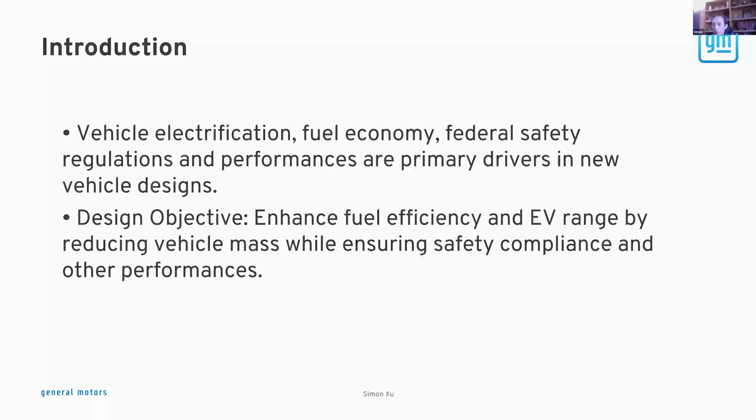So here I just focus on one problem, which is the fuel economy, efficiency, and EV range requires significant reduction in vehicle mass, but also while ensuring safety, compliance, and other performances. So this is a very interesting optimization problem that we tackled in the past with a manual process, and now we try to move into a more optimization-based process.

First, I want to introduce the idea of the magic of mass compounding. It's just an interesting idea, some of you may already know, which is when you reduce the mass in a vehicle, obviously it improves fuel economy, right? But also it lowers the loads on the powertrain.

Hypothetically, if you're reducing some mass on the vehicle subsystem, like the seats, frames, and structures, you actually reduce the mass of the total vehicle, which requires a lighter powertrain or smaller battery because you don't have as heavy a system to carry. Now if you have lighter battery and powertrain systems, the mass of those systems also significantly reduces, especially the battery, which is very, very heavy. As a result, you can continue reducing the mass and having improvement, and thus the compounding factors - I don't know if I make it clear.

Basically, reducing the mass of some component will result in lower mass in the battery or engine. The battery mass and engine will be actually lower, and as a result, more mass saving can be given, so you can have even lighter engines and lighter batteries. So there's a compounding effect. And also the reverse is true, because a lot of times people don't realize inside the company that we're adding mass just for some convenience in engineering, which actually causes a cascading effect of mass increase in many other systems.

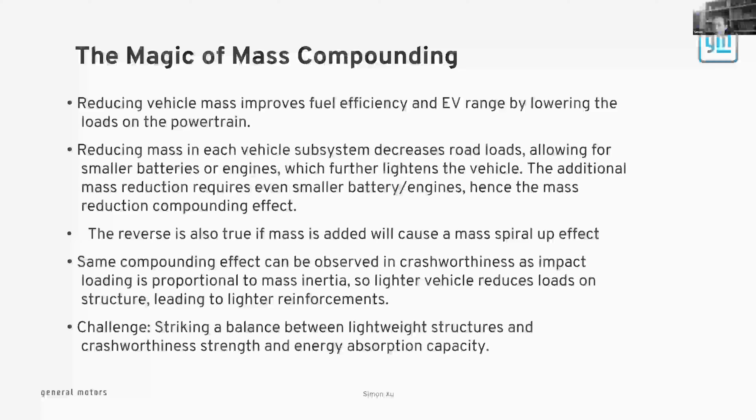It's a very complicated problem to tackle because you have to satisfy all these other requirements when you reduce mass. The role of design optimization is that we can use optimization to enable rapid assessment of different ideas, leading to total optimization for the goal. Typically the objective is to minimize mass because this is common, but there are a lot of performances, or constraints, in the optimization that need to be satisfied.

For example, in safety you have frontal impact, side impact, rear, offset, rear roof crush, all kinds of scenarios. Each one has its own test cases, many different requirements you have to meet. The two main requirements in safety are strength, which means the safety cage of the vehicle has to be stiff enough so it doesn't collapse, and that's the strength part.

The other part is energy absorption, where you want the vehicle to absorb enough energy so the deceleration or harshness of the impact to the occupant is minimized. Imagine you have to design a vehicle like a spring that absorbs energy, but a spring is not stiff. So right away you have two competing factors in vehicle design, and that's the interesting part of optimization - you need to balance all these factors that sometimes conflict with each other.

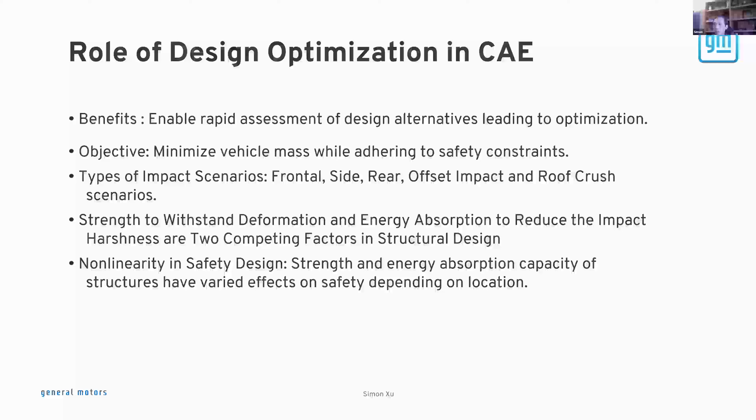Also, there's high nonlinearity in safety design because strength and energy absorption affect many different components and different parts. It's a very complicated problem because buckling and path dependencies also exist. These are the general ideas I'll go through quickly. Reducing mass, the simplest way is reducing materials, like the thickness of materials, but if you do that, you reduce the strength, so you have to balance the two.

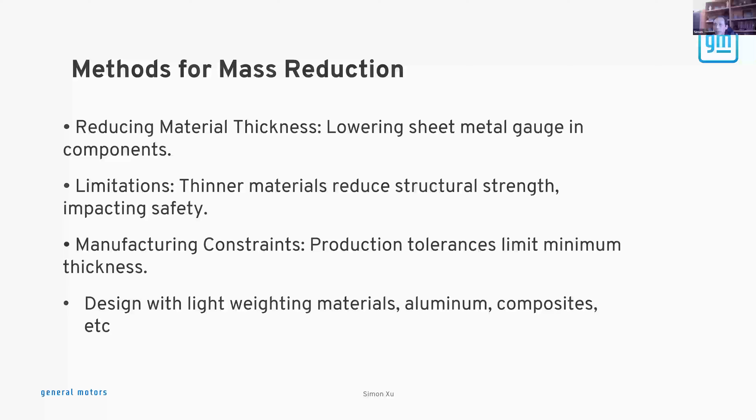Let me go through quickly. The challenge is how do we navigate these highly nonlinear systems, and also multiple systems we have to navigate with different simulations, all physics-based. Also in manufacturing, we have tolerances, so nothing is built exactly as you want it, so you have to carry some uncertainties in performance.

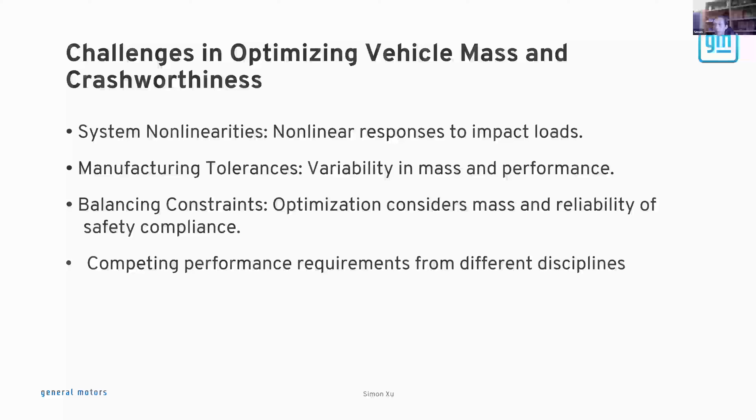Let me just keep moving. Here's a picture of what we call MDO - multidisciplinary optimization. I think some of you have been working on this for years, I've heard about it. It's not a new concept, it's been around for a long time, but the issue is how to resolve it because of the complexity of the issue.

You can see in the picture, maybe it's easy to follow. You have different load cases, or disciplines. Crash is one thing I already mentioned - you have front, side, rear, and also other requirements such as protecting pedestrians, we call it pedpro. Bender is really the bumper requirement, and so on and so forth. There's a lot of these.

On the other hand, the vehicle has to withstand noise and vibration - NVH stands for noise, vibration, and harshness. So you have modal frequencies, acoustics, low frequency, mid frequency, high frequency, different physics. Then you have dynamics, in that the structure has to be stiff enough to set up the suspension system, which absorbs energies. You need enough stiffness so energy absorption can be made, and also precision of driving for steering has to be stiff enough so you can drive the vehicle without actual delay.

Then on the other hand, you have fatigue life, durability stresses. All these interesting things are related to finite element models, basically dynamics models. And then you also have aerodynamics, some of which has to do with exterior styling, the architecture, and also internal aerodynamics in terms of HVAC systems. All these things have to be considered in the total system in order to optimize.

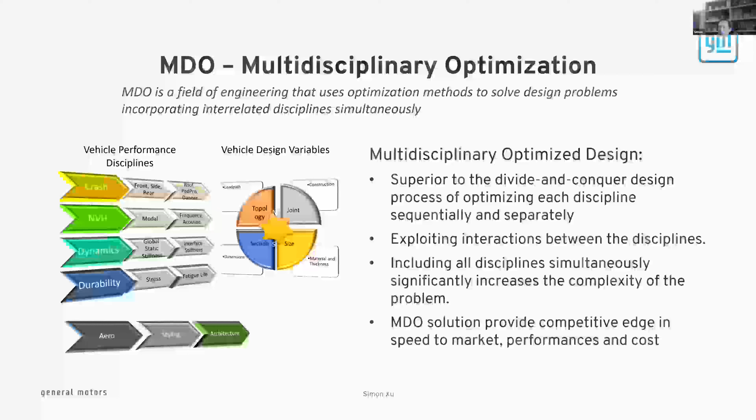The reason is that you can optimize one system for some purposes, but the systems are shared among many different disciplines, so you cannot just change it without affecting everybody else. That becomes a complicated problem, and this is where we actually focus in MDO to solve.

So here's basically, you guys can see, right? We developed a system called ASPEN, Adaptive Search and Progress Exploration, as a title. This is the gist of the algorithm. We couldn't share too much detail because we view this as a competitive edge. It is an industry-leading algorithm capable of handling hundreds of variables and hundreds of constraints, so you can solve really large problems in vast large spaces.

And we have many different commercial software and academic codes that we introduced, and Aspen is trying to get to the best of all the possibilities. So we have a system now set up to do this. On the right, this is the gist of what we do.

First, you have an initial DOE, which is the blue dots, that occupy the whole space. This is shown in 2 dimensions, but actually you have 100 dimensions, so you can imagine that you don't have many points in each dimension in terms of populating the grid.

And then you go through different simulations: safety crash, modal analysis, NVH. Then internally, we fit a quick response surface for each of the performances. Let's say if you have 200 performances, then you will fit 200 quick response surfaces. Once you fit that, then you can do optimizations.

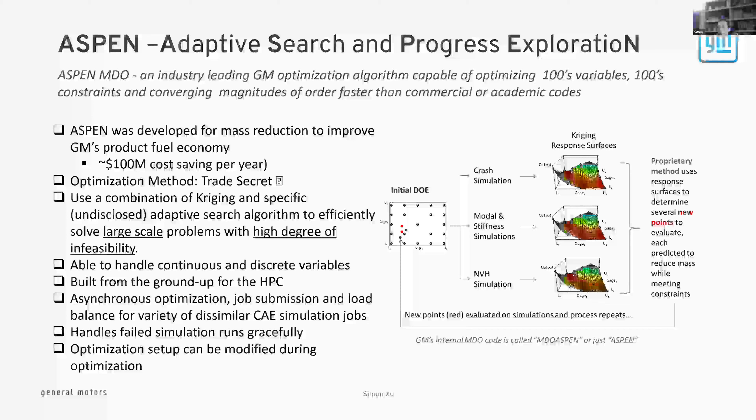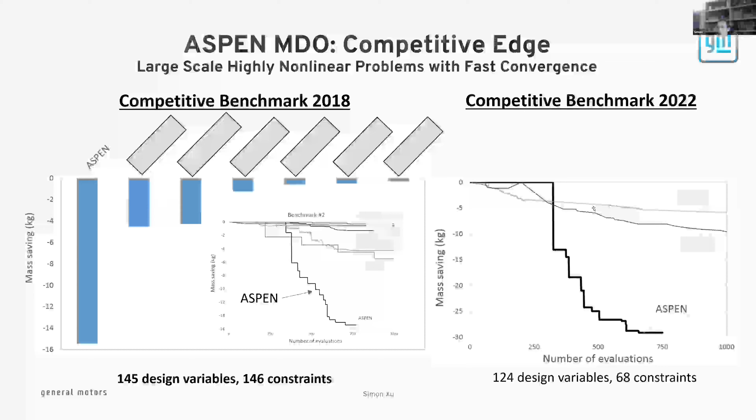Here's another example that we did recently, and a similar result. So I can explain in the next slide why you have such differences, even though they are all optimization. Somehow the computer doesn't like this slide, I think that one slide has animations.

So here's something interesting that might spark additional research ideas. A typical variable range, let's say 100 variables, if you have 30 levels, meaning a thickness of 1 millimeter, 1.1, 1.2, 1.3, usually going by 1.05, so you have about 30 levels on a typical problem. That's 30 to the power 100 factorial design possibility. It's a really, really big space to explore with, let's say, a couple hundred evaluations.

So as a result, you need to do adaptive search to get there. It's like zooming in 100 times, then you can get to the answer. That's the only way to do that. So I'll show you the example here.

At the bottom you can see a distribution of blue dots, this is the DOE that we do. It's all Latin hypercube, like a Latin hypercube kind of DOE, but we actually have a slightly more optimized version of that. The original starting point is orange, and lower left is more optimal because mass lower is better, displacement lower is better.

You can see, even though we are starting with a design here which is kind of optimal already by manual standard, when you do a DOE, none of these points are better. You would think the point would be somewhere in the middle so you could pick the best from the DOE and go from there, that's the kind of concept people have before they actually know the problem. But the problem is highly nonlinear, you don't get this, because the optimality is in such a small region. If you get out of it with a DOE, you don't get to that.

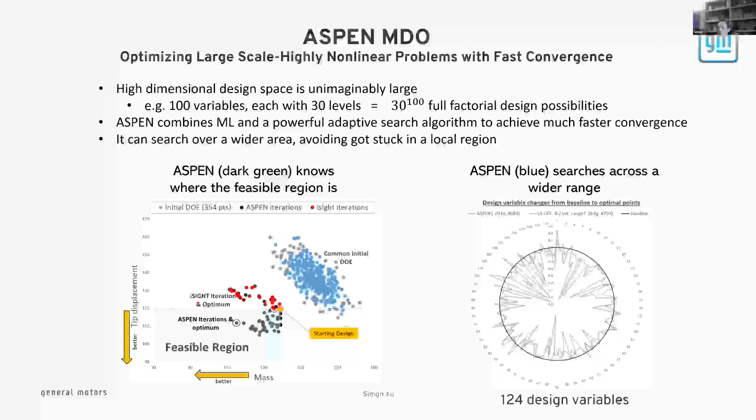So now that we've solved this problem, we're applying this to any problem that we can see. For example, there's some examples here just for fun. You can see these NVH, vibrations, stiffnesses, and dynamics in the middle, that's supposed to be moving, and I think it can move.

This basically shows the vehicle going through bumps and so forth. And if you turn attention to the right, it's a different crashworthiness scenario. I just edited the video so that you have the side impact and the rear impact, these are simulating cars hitting from different angles.

And you have the car hitting the wall, hitting a pole, and offset means hitting another vehicle at offset locations. And I think dynamic doesn't work, that's fine.

In terms of design variables, you can change the gauge, which is thicknesses. You have material grades - different grades of steels, aluminums, or even magnesiums, or composite. Also you have shape changes, or section changes, and spot welding, because the car is welded by these spot welds with pieces, like basically Lego pieces put together. So you zip them in the assembly plant.

There's a requirement to make sure the spot weld is minimal mass, so we don't put too many spot welds where we don't need that, but we need those for actual crash performance to make sure that it's tight. So there's also an optimization problem you can solve with these kinds of things. We have been pretty successful in applying these almost everywhere that we could use.

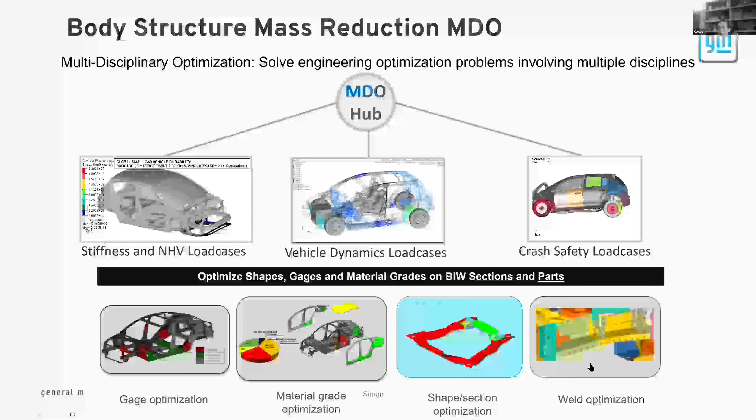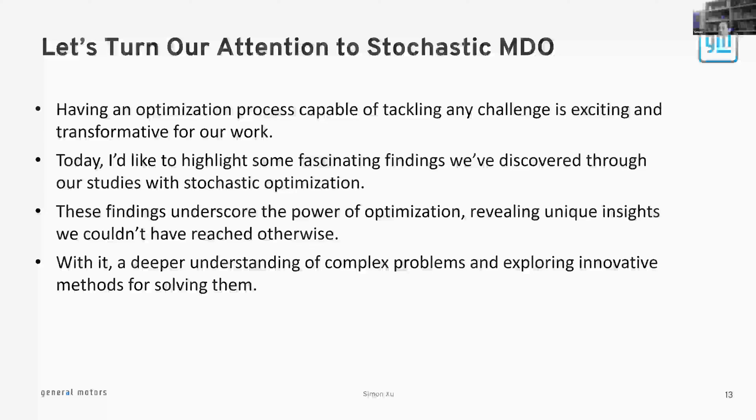So the next frontier I want to talk about is stochastic MDO. Now we have a capable process. I'd like to highlight additional recent fascinating findings we have through our studies on stochastic optimization. These findings underscore the power of optimization, which can reveal unique insights we couldn't have reached otherwise. With it, a deeper understanding of complex problems and exploring innovative methods for solving them will be something. That's why I want to bring this example here for people to kick around and maybe ask some questions.

So first of all, we want to develop this on top of the MDO, a stochastic-based optimization methodology, to optimize the robustness of crashworthiness. Because in reality, if a car is designed as a 5-star, we think, sometimes the government will randomly take a car from the lot and test it. We may even get 3 stars from that because of variations in a multitude of things that could happen and make it deviate. So we want to minimize the chance of this happening.

And so we need to have an approach. But typically engineers have an approach they call safety factors - basically they over-design it. GM always, if you look inside, we actually design products with much higher standards than the typical published standard. But on the other hand, if you do that, you are suboptimal because your mass will be high, and your cost will be high.

So this is kind of emblematic of a GM vehicle. If somebody ever drives the vehicle, it feels heavy, steady, more materials. That's because we have a lot of safety factor built in. But I think this is more like an old-fashioned way to do engineering, right? In aerospace, we know that in school.

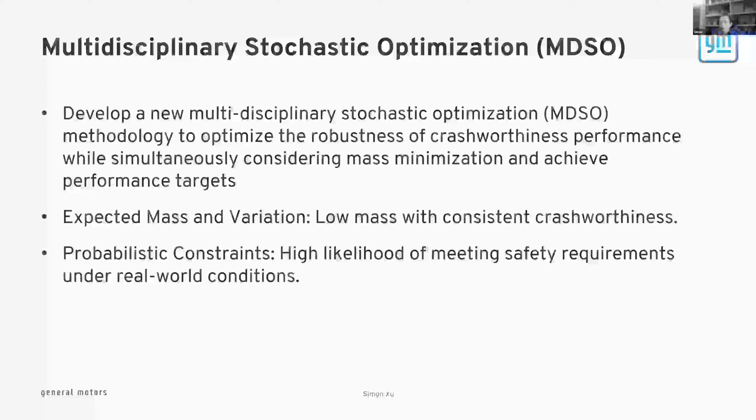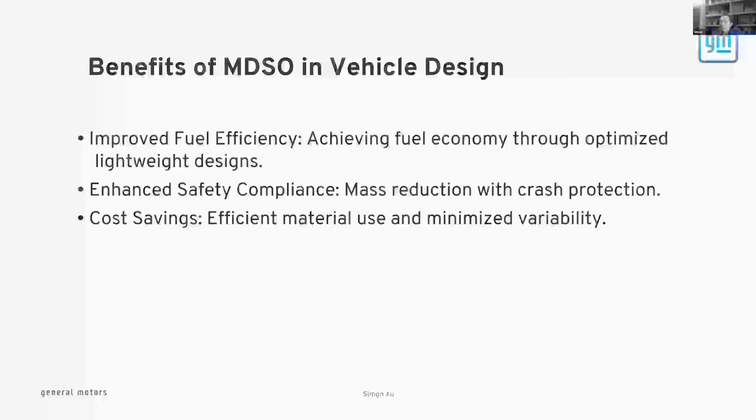So we want to introduce the process of using stochastic methods and variation uncertainty quantification to be able to narrow down, and maybe design even better, which I'll show as an example, which we can accomplish if we have the right tool. So the benefit of MDO stochastic is obviously you can achieve fuel economy and also get better reliability on your vehicle when you actually have the performance.

So these are the typical uncertainties - I didn't list all of them. Material property variations, sheet metal thickness variations, sometimes both, because when you stamp the vehicle parts, due to the curvatures and the pressure you're pressed on the die, the metal thickness is not even everywhere. Some places are thicker, sometimes thinner. If you're kneading dough, you know what we're talking about, right?

But also because of the pressure and residual stresses, each part actually has a pre-stress or pre-tension that changes material properties. So that all rolls into even one part. Imagine you have so many parts together, that's even more complicated. Of course, the operating environment - temperatures, humidity, acceleration off by 0.1 G can make a big difference, speed. And also we have assembly variations. When you assemble so many parts, each part may slightly deviate and you end up with big variations.

And the last thing I want to mention is there's uncertainties in our simulations because we use highly nonlinear simulation like LS Dyna, for example. What we found out is this kind of explicit solver can exhibit convergence issues. In the old days, depending on the computer platform you're running, you may get different results. When I first joined the company, that was kind of an interesting and frustrating fact. So people want to only run on particular CPUs, particular types of machines, so that they can have a consistent result, even though it's inconsistent between the machines.

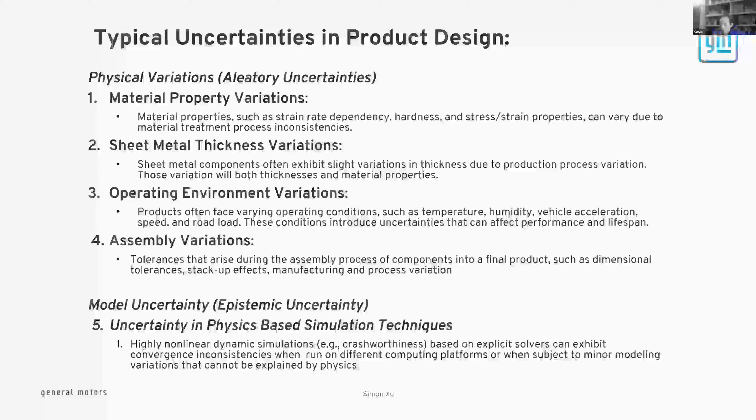So reliability-based optimization, reliability-based design optimization, as I already mentioned, is that we want to ensure the probability of failure or violation remains low. Like if you randomly test the vehicle, it has to pass with a good 5-star rating. We don't want to go to 3-star. Of course, this is subject to all the uncertainties in the design variables, especially in the material property, because we know the steel stock actually has a tolerance they give us. They don't guarantee from the steel company that 1 millimeter will always be 1 millimeter.

There's a plus minus range and distribution. So if we know that information, we can actually account for it. That's the idea.

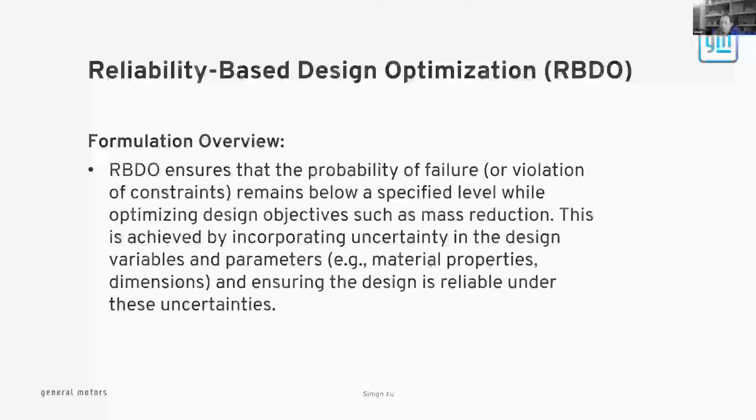So this is a simple mathematical formulation. Quickly, you can read that. Basically X is the design variable. G is the performance function, driven by the variable, could be crash performances. And D is your random variables.

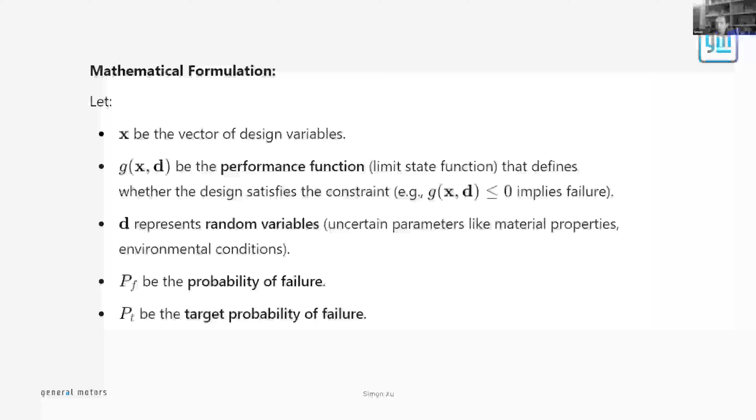But in the problem that I'm going to show, D is part of X. Basically, it's X, but it has variations - when X is equal to 1 millimeter, D could be plus minus some small percentage from that. And the PF is the probability of failure, T is the target, because we want the probability to be 100%, but it's not possible, maybe 95% target non-failure, 5% probability of failure, or could be 1%. It depends on the situation.

So the optimization, the goal is really to minimize the function. In this case, the function could be mass or cost - that's also important. And subject to the probability of failure being less than some target value. And X has a bracket, lower bound and upper bound, because that's how you do the optimization.

So some techniques have been studied, first order reliability method, second order, but I do not quite like these methods, or they don't quite apply here because of high nonlinearity - I'll get into a little more detail - we cannot assume the output has a nice distribution, like a normal distribution, and it's far from it.

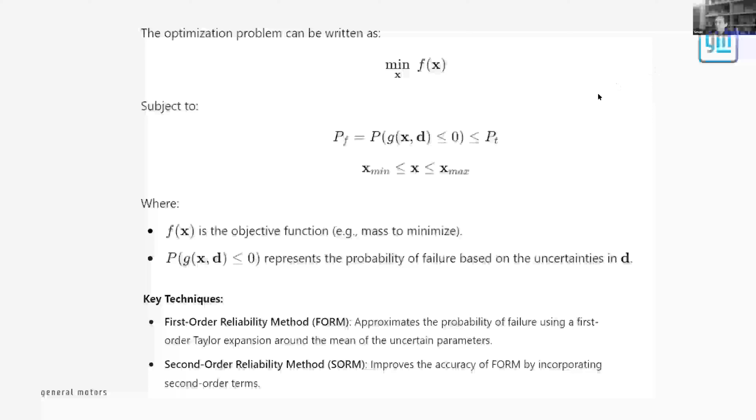So that's why we have to find some alternative ways to handle the reliability and to see if I can move. Just be patient, I press the button, you know, move. Oh okay, moving.

So the basic visual image typically people have in the literature or in their mind is that you have these constraints, multiple requirements, and there is an objective function going one way, like minimize mass.

Of course, as you minimize mass, you're violating the constraints. So the optimal solution, the yellow-orange dot, is at the boundary when you actually have the optimal. Sometimes it's not at the boundary because one constraint is active, the other one may not be active. But assuming that's right at the intersection.

So imagine if you do a small basic perturbation of the variables at the optimal values, you will see a cloud around this point. So in order to make it robust, you need to move the cloud away from the boundary, which is a kind of mean shift optimization to get away from it, similar to a safety factor we always use in engineering, right?

So we know that our target is to be 1, but if we do 1.1, higher is better. And even though there are some variations, I should be able to manage it, sometimes even 2x safety. So it's the same kind of concept without knowing the complexity of the problem. It usually could work if you have a large enough safety factor.

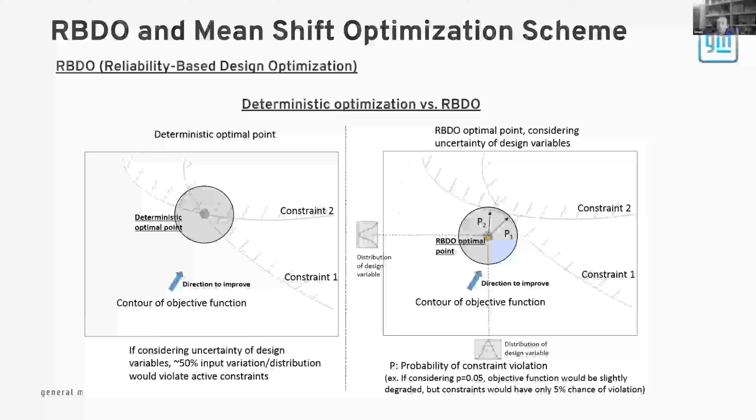But in reality, how things look, that's another question. That's why I want to show you this example next. So like I said, the limitation is the assumption of normal distribution may not be true, and real world systems exhibit nonlinear behavior that do not conform to it.

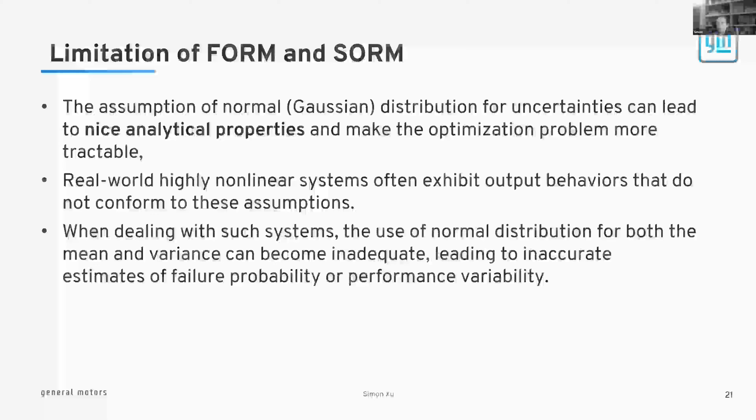And when dealing with these systems, we may have difficulties to accurately describe the probability of failure. But like I said, it could be practical that you keep moving from the boundary. Eventually, you can deal with it because we have to deal with it if we don't have any tools to deal with it.

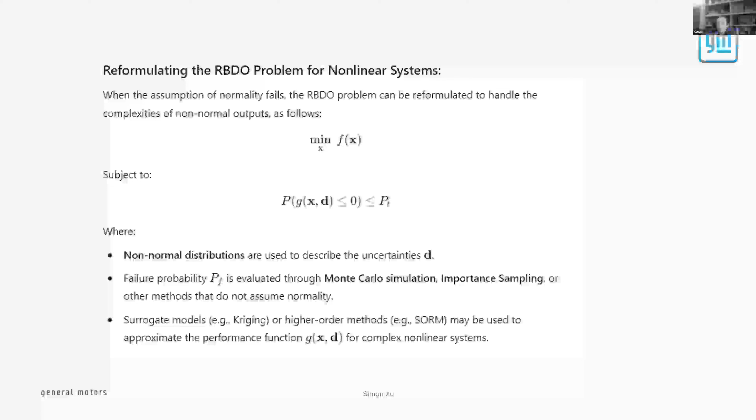So the way to reformulate the RBDO problem, this is not new either, is that you do the same thing: minimize the functions subject to the probability of failure being constrained. But on this side, the P is evaluated through a Monte Carlo simulation, which is basically changing the variable around each value based on the tolerances through a distribution and passing the variations through the function to the other end. So whatever comes out for that particular constraint is the distribution you're going to get. And if you have multiple functions, multiple outputs, then the joint probability is what we're interested in.

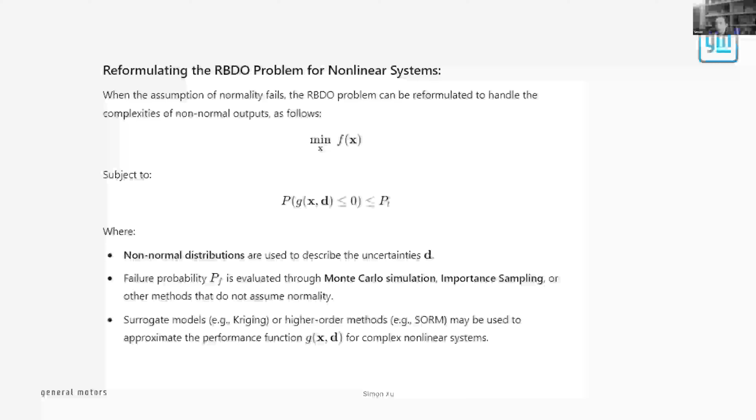Because if you have 2 crash load cases, you want both of them to be highly confident. Maybe one has a different value than the other. It doesn't really matter — it's really the joint probability of meeting both that we care most about. So that would be the correct way to solve it, but it's more complicated because now you have to do Monte Carlo simulation for each evaluation, which itself, like I said, each performance assessment takes 10, 15 hours with 400 CPUs. So how many Monte Carlo simulations can you actually do?

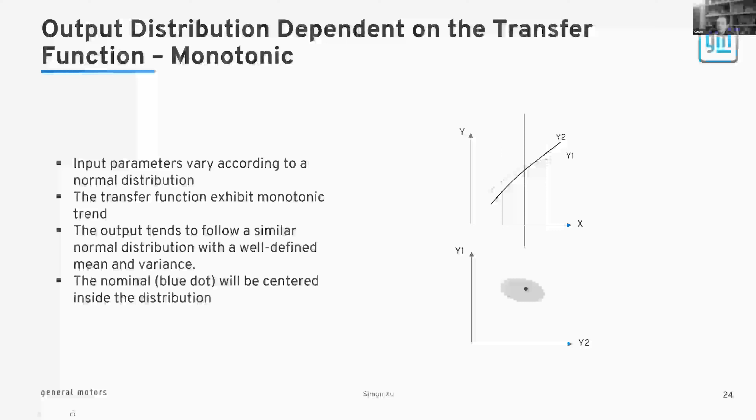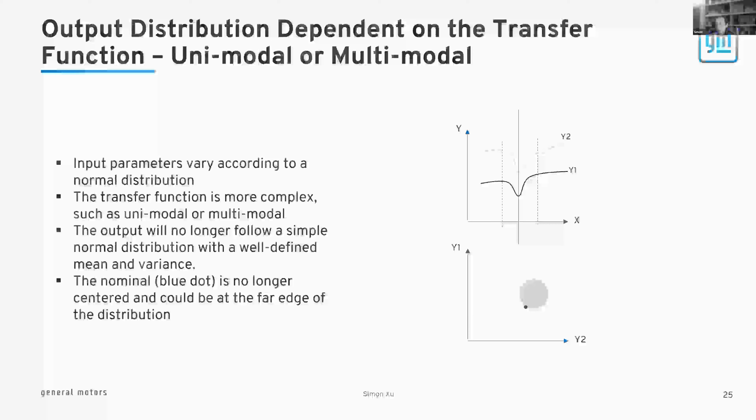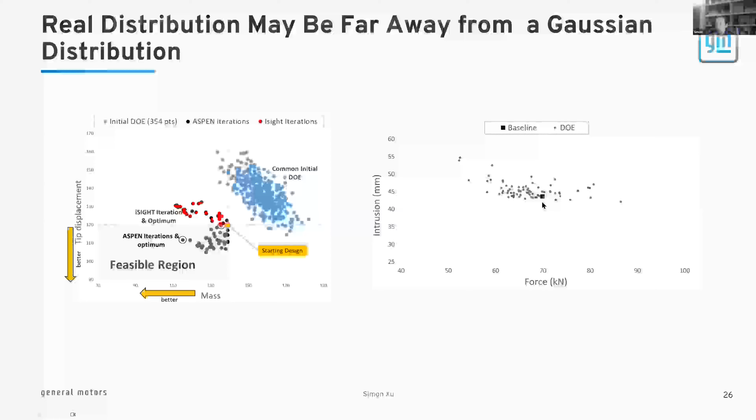Of course, this one has some lower values, but the force is too high, so it's not necessarily better than the black dot. That's why it makes it harder, or more interesting, to solve with optimization.

So Monte Carlo simulations — that's simple. Basically, you just do a Monte Carlo simulation with random sampling, then use response surfaces, since that's something we already built, and use this as a surrogate model. Even though the response surface may not be that accurate, at least around the point it's very close to it — the accuracy is good enough for assessment.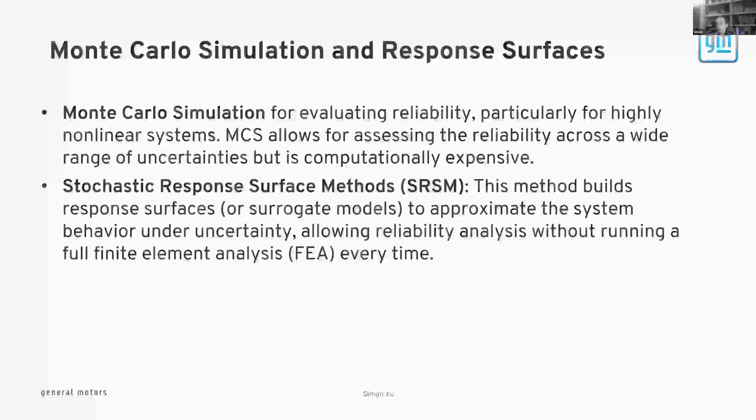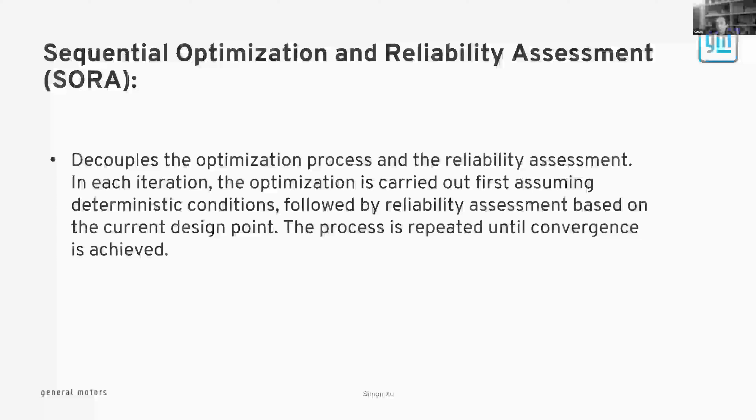But then we can update the surfaces locally once we get closer to the optimal. There are two different ways. One is sequential optimization, where some people do a deterministic optimization first, followed by reliability assessment, adjusting around that. This can work, but it will make your design very close to the design you already have.

The ideal way is concurrent optimization instead of sequential. There's a lot of work here. Basically, you want to do the optimization and assess the reliability at the same time for each of the points you're getting, then fit response surfaces, and use Monte Carlo simulations on each point to get the distributions of the variability.

Then I fit another response surface for the entire domain, so now I not only know the performance of whichever functional value at which point, but also the variability of that particular input. So if I have an input at a certain optimal value, I'll know whether its performance is good and whether its reliability is good. If I have another alternative point, I'll know this too. Now I have two response surfaces for the entire field for each performance, giving both pieces of information.

If I can define a problem like this, I can solve it, because now I just have two different requirements for each original requirement, doubling the constraints. Since our algorithm doesn't really have a problem with a lot of constraints, doubling the constraints just means adding more response surfaces. We can fit these response surfaces in parallel using HPC, high performance computing, and off we go. So this is how I construct this problem to be solved.

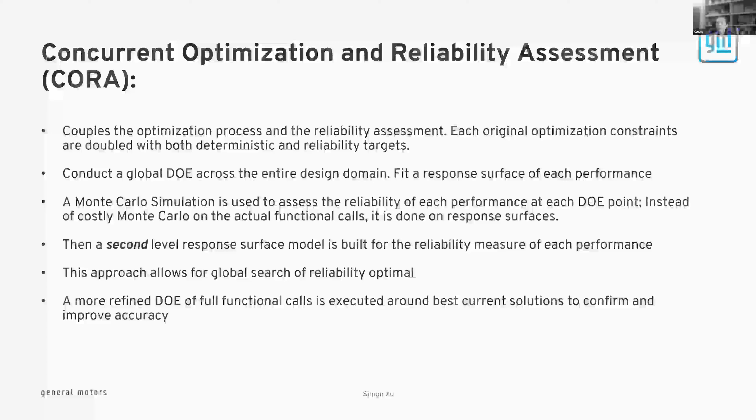So let's find out how we do. Here we have a safety problem, crashworthiness. I have two load cases, each with multiple outputs, US NCAP and Euro NCAP. One is the car hitting a rigid wall, the other is the car hitting another car, which is deformable but offset.

These are two competing requirements: if you hit a rigid wall, you want the car to be compliant, because the harder it is, the more it hurts you. If it's a deformable barrier, you want the car to be stiff, so you overcome the other car and sustain less damage. But they want you to meet both, so you balance out damage to yourself and to other vehicles.

So these are two competing requirements, with different targets. In this case it's a reduced problem so we can study more detail: 28 variables, each with an upper and lower bound defined based on manufacturing limitations. Plus we have thickness variation distributions based on plant-given variations typical from manufacturing, so we also define the band around those materials.

The total mass of all parts is to be minimized, because mass equals cost and mass equals total vehicle performance efficiency. The initial performance is close to requirement but not quite, because that's the best they can do at the time. For that particular load case they keep improving it until they can no longer improve it, then they give it to us to optimize. So it's not quite meeting performance, but it's not too far away.

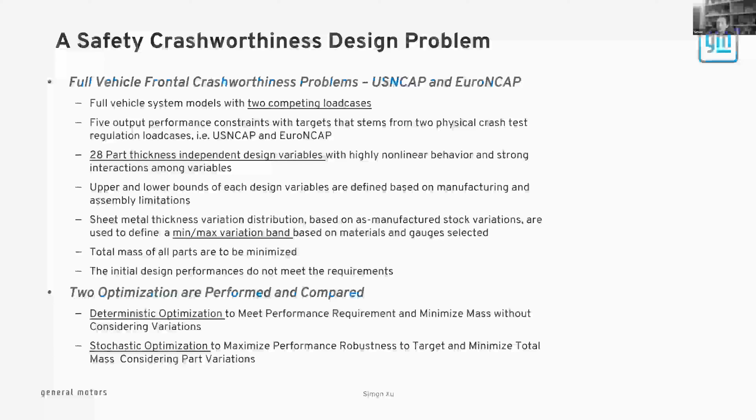Second, we did the stochastic optimization, which, like I mentioned, uses the formulation where I want to increase the probability of both performances meeting at the intersection, a joint probability, to be as high as possible without sacrificing mass. So that's the problem description.

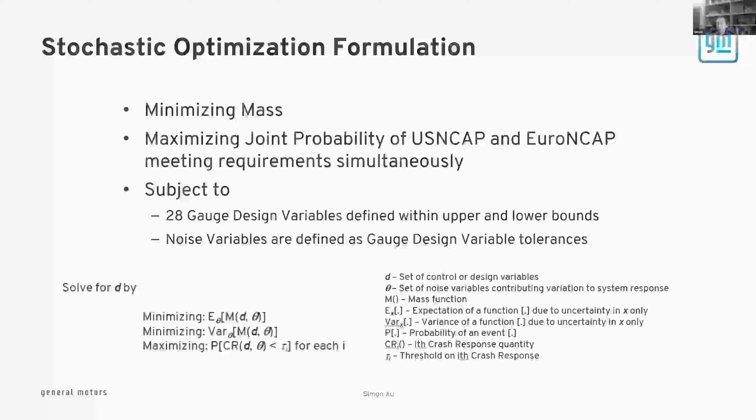I'll skip that — same thing, there's a formulation there, basically minimize the expected value of mass and variation of mass, which we don't need to worry about, and the joint probability of all the crash performances, 1 through I. In this case I have 4 or 5 different performances. So I want to solve this problem with the system we have in place. For the deterministic problem, I'll go through this quickly.

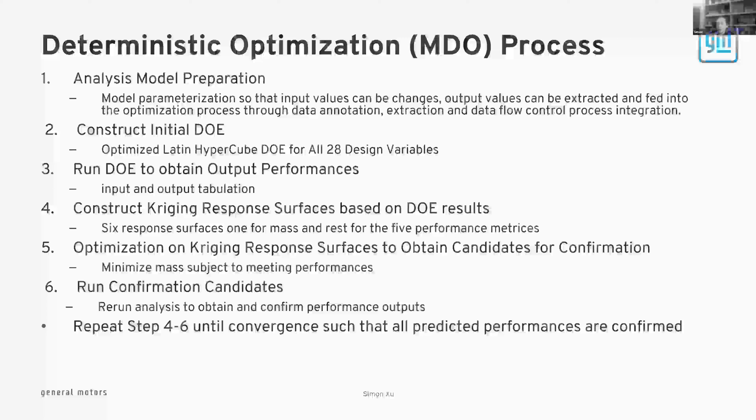We do the model preparation, parameterize everything, extract the data, and construct the DOE, run DOE, and then using Kriging response surfaces and optimize on the surface, but we don't trust the result. So we actually select different candidates to go back and iterate and repeat. Like I said, it could repeat 100 times or even more through the HPC. Basically, we don't need to worry about it, it just does it by itself.

The stochastic process, the blue ones, is basically adding additional things like Monte Carlo simulation on the response surfaces every time I have a DOE point. So let's say I have a DOE starting with 100 points distributed throughout. Then I fit the response surface. Now I have a surrogate model. I right away can do Monte Carlo simulation for each of these 100 points around it using the distribution. And now I will know the variability of each of these points, and then I can fit a second response surface to approximate the second order effect, which is what the variability of each performance is at each point, and fit it throughout, so I have a continuous surface that's differentiable.

So as a result, I have 2 different performances. One is the actual performance, the other is the variation of that performance that I can use as a constraint to optimize. So that's the gist of it. I will go into the detail that I already talked about.

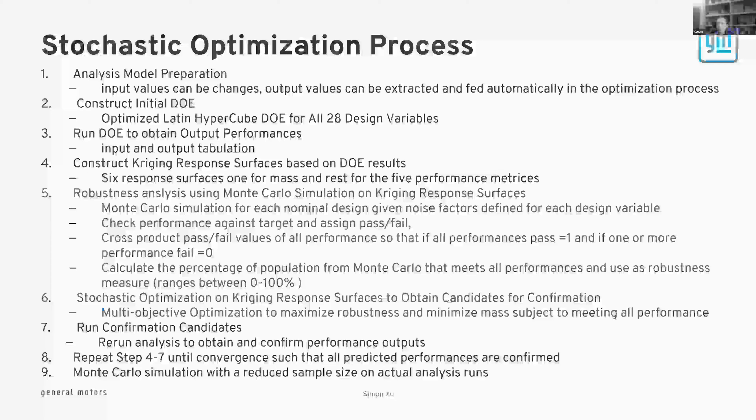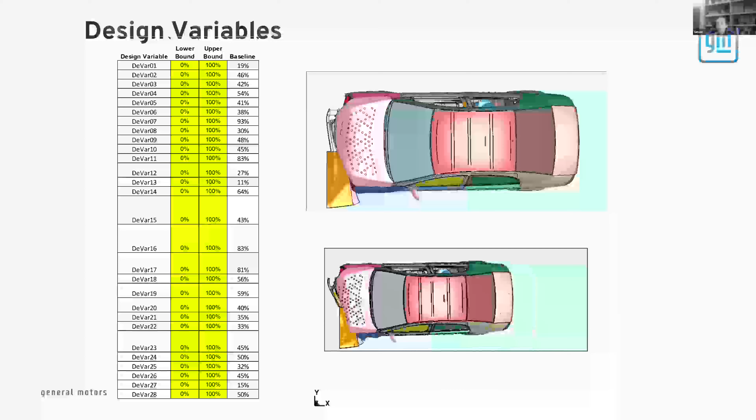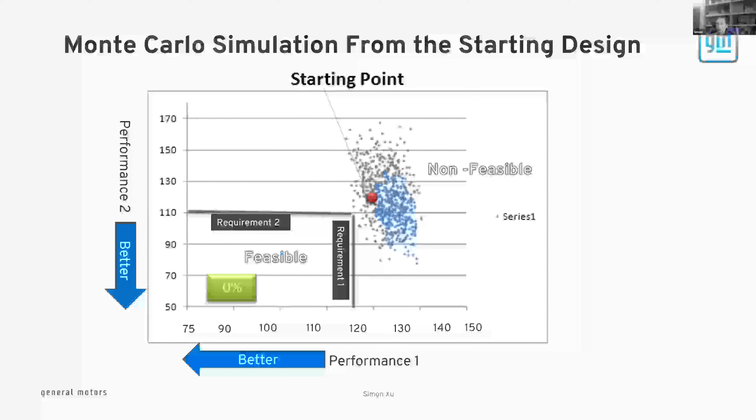And the reason is - I won't get into too much detail - is that we actually have a requirement that's higher than the normal requirement. So if you hit that requirement, there's a good chance that you're already kind of over-designed for robustness, and this is what we see.

Because every time you optimize something, you make things worse, since I'm on the knife edge, on the cliff. And I don't want to fall off the cliff by optimizing me to the end. So this is emblematic of what they have in mind, that you make it optimal, but not necessarily more robust. They can't articulate that fact, but this is what they're afraid of.

But basically our answer is that if you want something fixed, just tell us. We can put a constraint on it. In this case, we didn't have any constraint on the robustness because of complexity or something. But if we put it in, we may have a different picture. So I want to show you the next result.

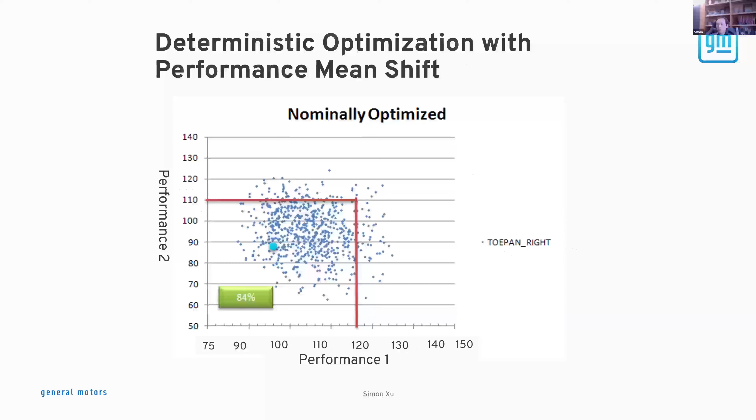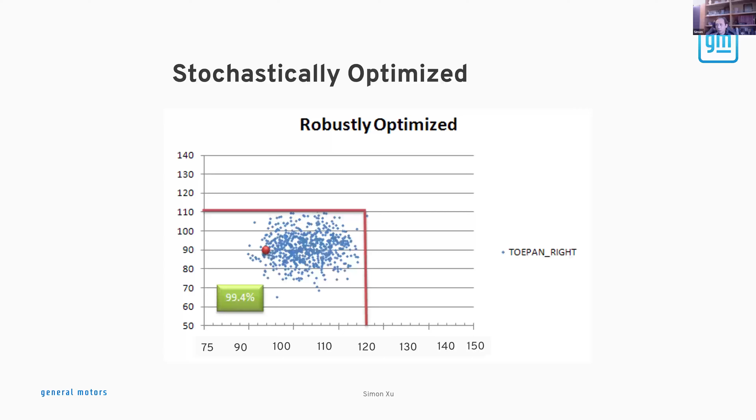So this is actually the optimization we did after we introduced the robustness variations into it. And you can see it's a lot tighter, and it's almost 100%, 99.4. So we're pretty happy with this result. You can see the dot actually also kind of shifted a little bit, but it's very close to the deterministic optimization. So we actually achieved what we think we want to do, because of the computer power and also the formulation.

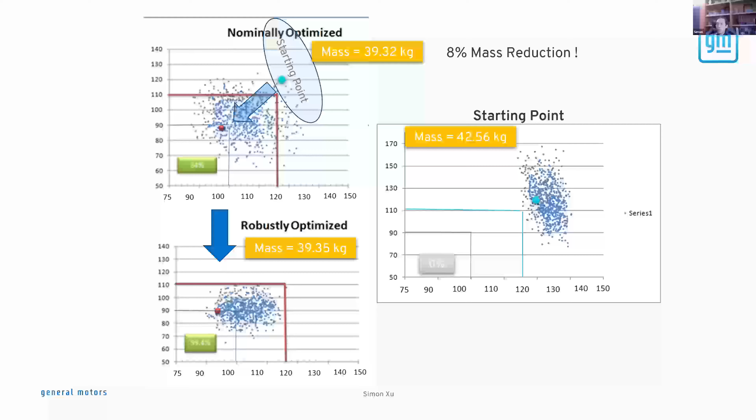So to me, these are probably not exactly the same solutions, but that means this kind of multi-dimensional space is very complicated. There exist multiple solutions in there. So if you ask a new requirement, it may navigate to a completely different solution if one exists. In this case, it has a different solution, which has the same mass, but different behaviors. You can see the red dot is close, but not really the same in terms of performance.

So the other thing people ask me is, hey, with the solution you have, they found they can't find the rules very easily as to why this thing is better. That's because the problem is so complicated. There may be multiple solutions and multiple ways to interpret the same thing. You're getting answers that meet the performance for the problem you defined, but there might exist alternatives beyond the one you already have.

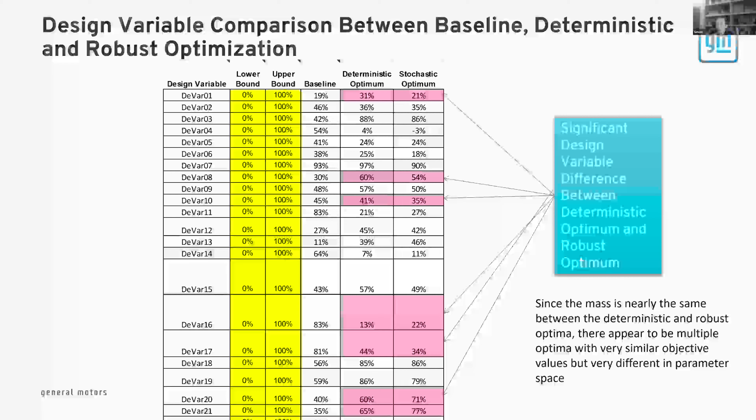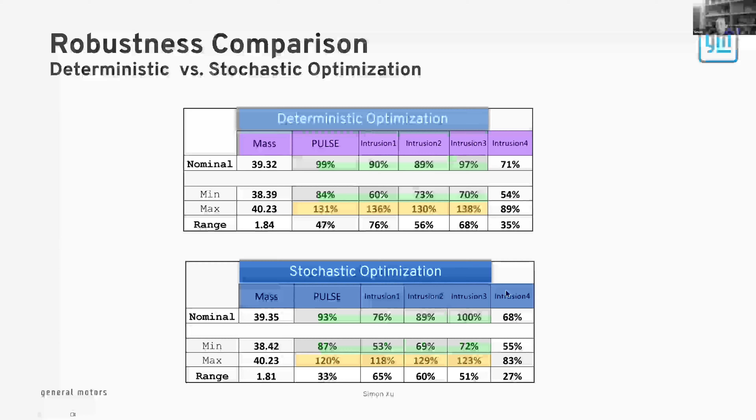This is one thing I want to spend a minute on, to understand better: in the high dimensional space, it's very hard to visualize because it's more than 3 dimensions, very hard to draw. In this case, I have 30 dimensions. So what I did is draw a straight line between the deterministic solution and the optimized solution. Let's say the deterministic solution is at 1, 1, 1, and the optimized solution is a different number, three sets of numbers. So I just draw a line going through the hyperspace from one to the other, and then ask it to print out, since we have response surfaces, what will the performances be going through this line? Is it getting better or worse, and what's in between?

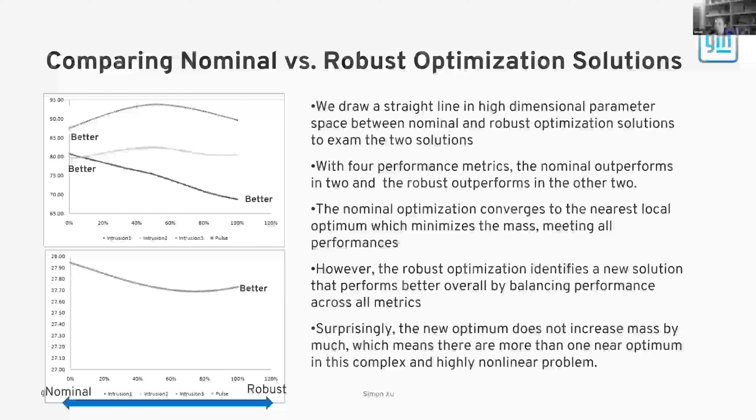This is an interesting point I want to raise, food for thought in terms of optimization. With this, we have a much better understanding and a tool we can use to solve a lot of similar problems. So, kind of a recap: we now have a tool, and we're able to successfully solve the problem.

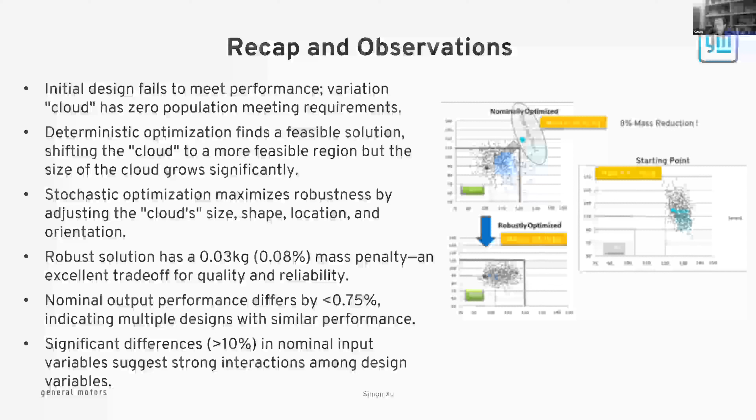But the solution makes sense in the end once we see it. That's usually what we find—once you solve the problem, it starts to make sense. If it doesn't make sense, you'd better check, because sometimes there's something wrong with the methodology, and that's always the case we find out. I think time is limited.

I just want to mention other things that could be interesting in the future. Right now we're solving a continuous problem, maybe some discrete, but some engineering designs are very discrete, like adding or deleting a member, or different topology, meaning different connectivities, different scenarios—where do you put the battery, in the front, in the center? These are not simple continuous solutions that you can parameterize easily. I think we need additional capabilities to develop, looking to solve these kinds of problems.

I'm listing some of these, including machine learning and AI, which is the hot topic we are kind of pursuing, outside the scope here. But if you can generate designs through scenario analysis with machine learning capable methodologies, you'll be able to go through an even wider variety of design possibilities. So I'll stop right here to see if there are any questions.

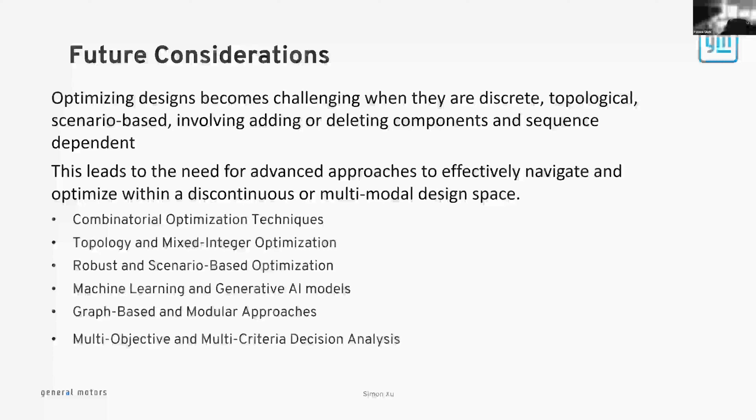So the software you are using, is it an in-house developed software, or are you using some open source software? What kind of tools are you using to run the simulations or optimizations?

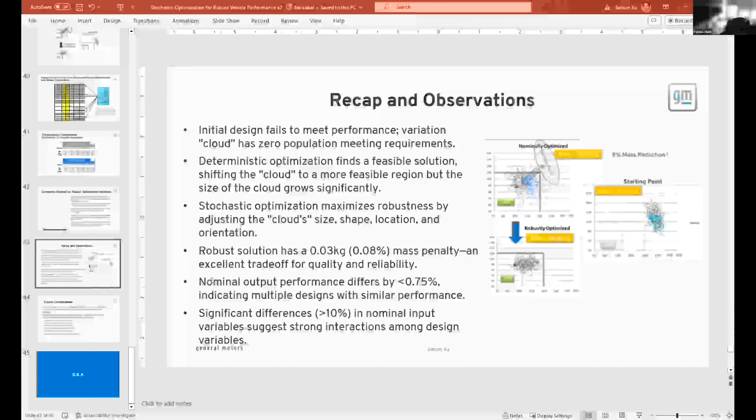Yeah, like I mentioned earlier, we have used many commercial software on the market. There's pretty capable software out there, but we were not happy with the performance for very large problems. So we developed some in-house capabilities to address it, and we're pretty happy with the performance we have so far. It's still kind of state of the art.

Are you using GPUs or CPUs, or are you using hybrid calculations? For the optimization, we are using CPUs, but a lot of massive parallel CPUs dedicated for this work. The GPUs, right now, we find useful for machine learning training, but we don't use GPUs for this because...

I'll just answer from a non-expert point of view: GPUs are probably good for very massive parallel computation with simple computations, like neural network propagation. But we actually have a highly nonlinear physical system, so they run best on CPUs, but we make the CPUs run in parallel together. The optimization algorithm itself doesn't take a lot of brain power—basically they're working on response surfaces, so they converge pretty quickly. So we conduct a lot of optimizations for each iteration.

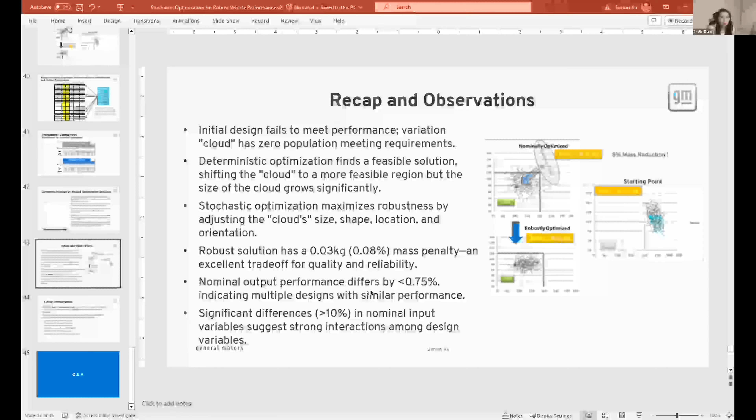Thank you, Simon, for the very informative and interesting talk. I'm very curious about one thing you mentioned earlier—I think towards the beginning, when you talked about the role of design of the car, different components, and the competition between strength and energy dissipation. In the topology optimization or optimization design process, would plasticity be something interesting to consider? For example, large deformation or finite deformation plasticity?

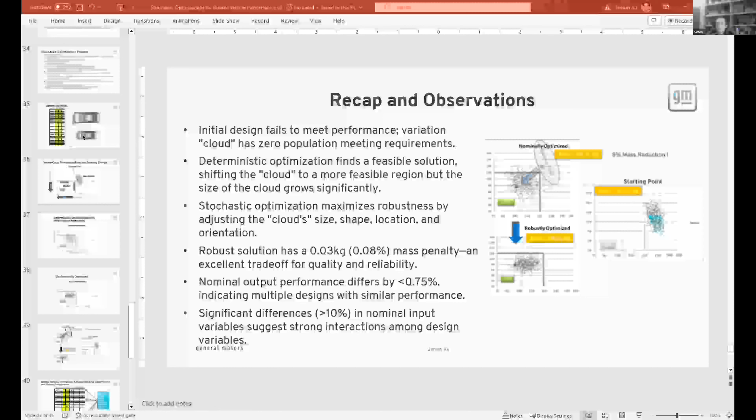Yeah, so this is a good question. Basically, we're using commercial software to evaluate all the plasticities. We have material properties from the test lab that look at not only the plasticity but also strain rate hardening effects, depending on the speed of the crush. So it's getting pretty complicated in these nonlinear models. We're using these nonlinear models and their complexity to try to solve an optimization problem.

Right, would that be considered embedded in the optimization loop, the plasticity, or is it more of an analysis that comes before or after—basically post-analysis or pre-analysis of the design? Yeah, so the optimization is outside the analysis itself. If you have an element formulation and you apply loadings on it, we wait until the solver completes its solution to give us the output in terms of the behavior in simulation. Then we investigate the relationship between the input and output, and optimize that way.

So we skip the middle—that's basically the physics part. But I think there are some ideas we have about getting into the details, especially with current machine learning capabilities, because right now we're working on an input-output relationship without knowing the true animations or deformations of each element and each part. So we're losing a lot of information in optimization.